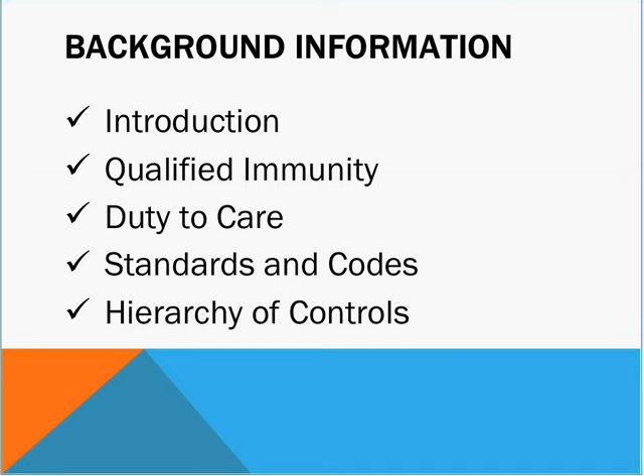Let me jump to the next, which you covered already. Anyway, in the beginning, I would like to give you a little bit of background about this subject matter, and let me begin right away.

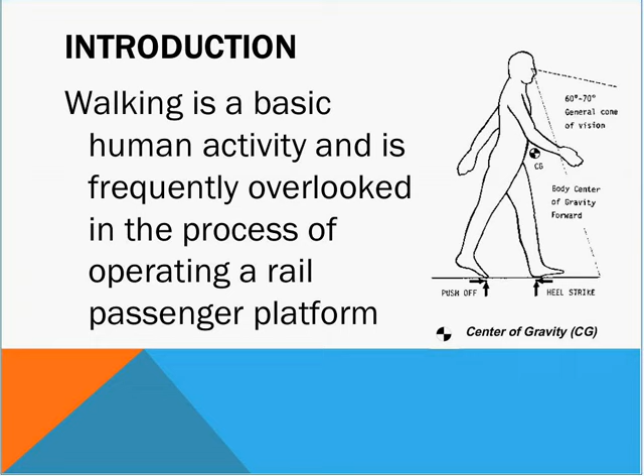One of the things we sort of take for granted, and it's probably one of the most complicated things that we do, is walking. It's a basic activity, and is a key factor in operating a rail passenger platform, although not given much consideration in most cases. We have a general tendency to blame the rail passenger when there's an accident. Usually we find that transportation companies or anyone says that the accident was caused because the person wasn't careful, wasn't watching where they were going.

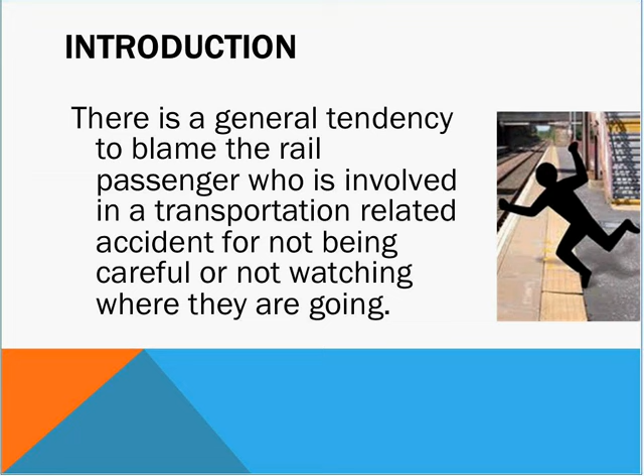One of the things to keep in mind when dealing with public agencies, and this is from New York State and applies to most states, is this qualified immunity, where if municipalities adhere to their guidelines, then they're exempt from the injuries that might be caused as a result of their adhering to their guidelines. That is called qualified immunity.

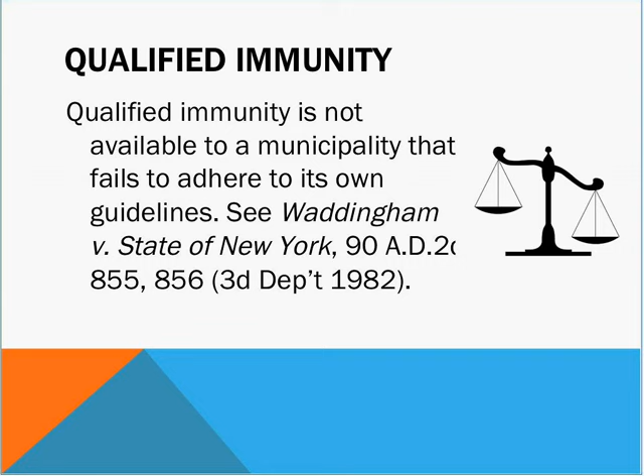It's my feeling that there is a duty of care required, and the important duties of care are to warn passengers of dangers, to properly train personnel to deal with dangers or hazards, have safety inspections on a regular basis, provide effective communication of when there is a hazard or a danger, provide platform personnel when there is a dangerous or hazardous situation, and to ensure that design standards are always updated as a result of industry changes in standards and guidelines, in particular the Americans with Disabilities Act.

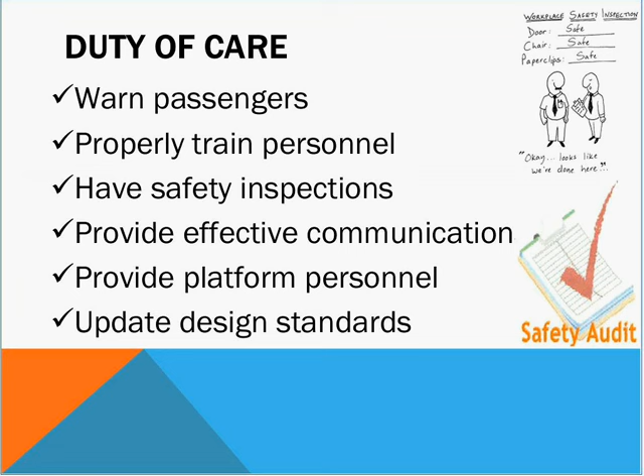One thing to bear in mind is that a standard is really developed as a consensus. It's generally the minimum that one should do, not necessarily the level we should be at. Because of the consensus requirement to build a standard or guideline, not all situations are covered by standards and codes. One of the things that should always be done is to have risk assessments on a regular basis to determine the level of risk, how to achieve compliance, and how to create an acceptable situation for the situation at hand.

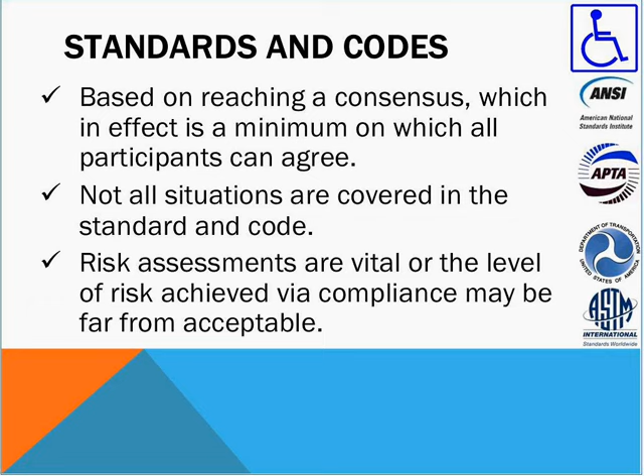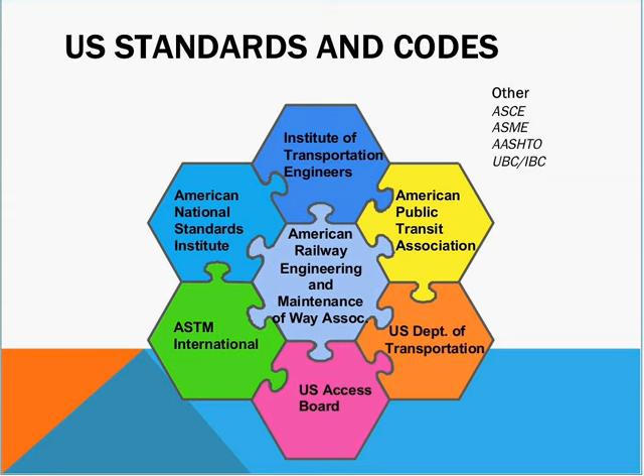Here are some of the codes that are out there: the Institute of Transportation Engineers, the American National Standards Institute, ASTM, the U.S. Access Board, which sets the ADA standards, the U.S. Department of Transportation, and the industry group for rail transit, the American Public Transit Association. There are also a lot of engineering groups out there: the American Society of Civil Engineers, the American Society of Mechanical Engineers, the American Association of State Highway and Transportation Officials, and the Uniform Building Code, which has now morphed into the International Building Code, the IBC.

There is a sense of a hierarchy of control. The first thing one can do is remove the hazard in the first place during the design process. If that isn't done, then the next step is to reduce the hazard through redesign or through engineering controls. And if that isn't enough, then through information systems, automatic and manual warnings and signs, and on a regular basis, inspection and training of personnel.

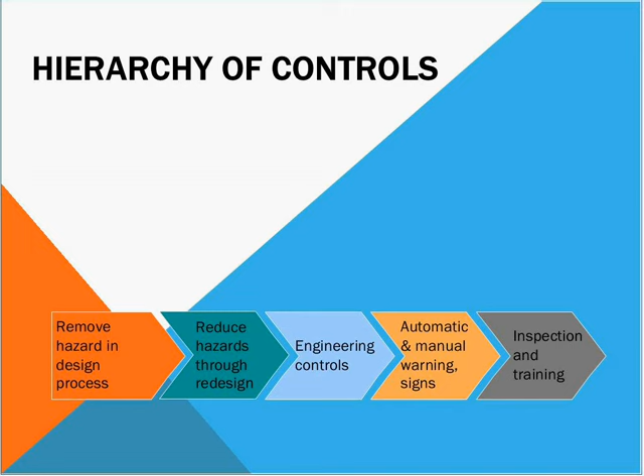Platform hazard prevention - this is the process one needs to go through to understand what hazards are out there. First is root causes, which involves the search for those factors that cause gap accidents in the first place, and to seek from among the available data the nature of the causes that lead to the undesirable consequences which result in injuries.

Causations are the factors present when you have a gap accident, such as a horizontal gap, a vertical gap, or a combination of the two, the lack of information systems, the knowledge and experience of staff, the training and retraining programs of staff, and the use of platform tactile strips - those yellow strips you see at the edge of platforms. In some cases, the placement of rubbing boards at the edge of the platform so the train can park closer. Also being used is extending the door sills with extender plates, and of course lighting.

Important in preventing accidents is the accident investigation itself. Sometimes there's a failure to collect hard facts - what happened - and by knowing what happened we can remove or prevent that in the future. There's a need to ensure a thorough analysis and a step-by-step procedure is created so we get a clear picture of what caused the accident. In many places, when a passenger is injured, the opinion is normally that it's the result of human error on the part of the person who's injured, and not any fault of anyone else.

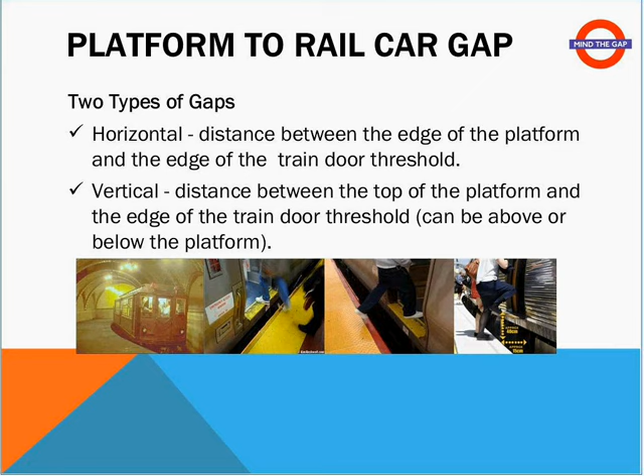There are two types of gaps: one is horizontal, and the other is vertical, and both are equally important. In most cases, one seems to be concerned with the horizontal and neglecting the vertical, but both are important. There are also two types of platforms: the low-level platform, where one has to step up into the rail car, and the high-level platform, where you go straight in.

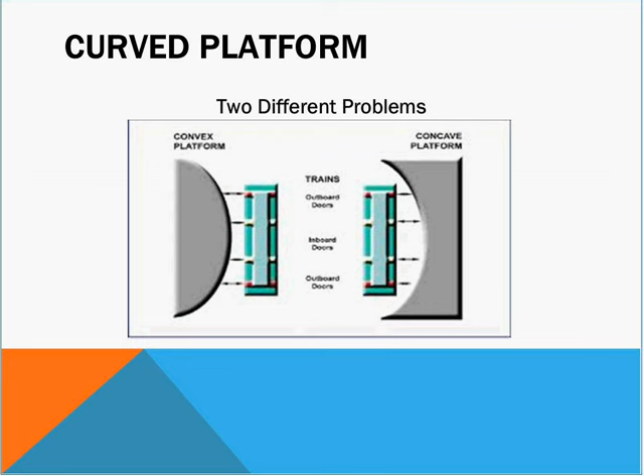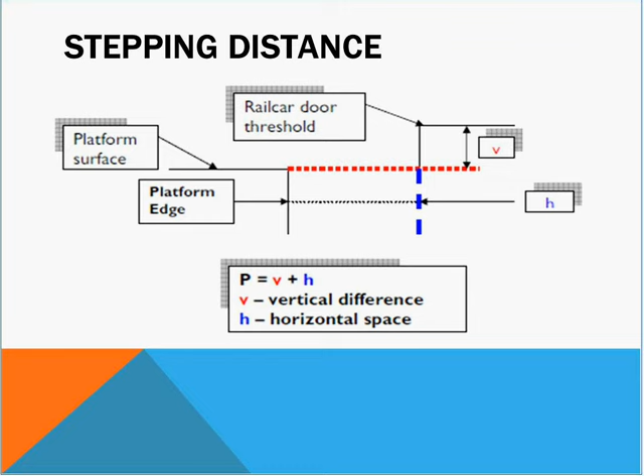Again, it's important to consider both the vertical and horizontal gap. There have been numerous studies in this area, particularly two - one in England and one in the Netherlands - where they found that the gap distance for both the horizontal and vertical together should never exceed 200 millimeters, about 7.9 inches. That includes whether the vertical gap is above or below the platform. Both are concerns - one concerns tripping, and the other concerns a misstep. We'll talk about that.

There are various attributes that can be considered that can reduce the dangers of boarding or disembarking from a rail car. The first is accessibility, where you have full accessibility for all users and the station platform meets ADA requirements. Active warning is important, where you accurately and functionally inform passengers of any hazards so they know what to do and how to handle it, usually provided through automatic message signs and regular announcements.

In terms of the level boarding area, the gap between the edge of the platform and the rail car should meet ADA standards: horizontally in the range of 3 to 4 inches, and vertically not exceeding 1.5 inches.

The area in which people board should have clarity. It should be obvious where one is embarking or disembarking, and it should be clear, with no obstructions or hazards, making the path the passenger follows relatively level and resistant to slipping. Everything should be conspicuous, ensuring that any potential hazard comes to the attention of the passenger.

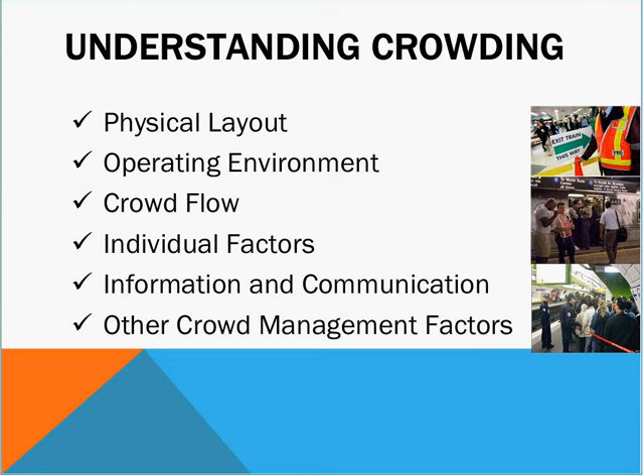A second area is platform crowding, which results from various factors that influence passenger behavior. Some factors are the basic design and fixed aspects of the platform, while others are flexible and can be influenced by actions taken by train station staff. We need to understand the layout, the environment, how the crowd flows, individual factors affecting crowding, information and communication systems, and other crowding management factors unique to a particular location.

Here's a way of visually cueing in to an accident: if you see the whole body, you don't have a crowding problem. If you see bodies one on top of another, you're beginning to have a crowding problem. If you only see people up to their shoulders, the crowding is getting more serious. And if you only see heads, then you know for sure there's a serious crowding problem. In the second, third, and fourth situations, one needs to take action to prevent things from escalating, because crowding is an accumulating factor—you can quickly go from level 2 to level 4.

Factors for crowding are numerous: the layout of the platform, obstructions on the platform, where access and egress is located, the time passengers arrive and depart, train timetables, how many different train lines use the same platform, coordination with other modes of transportation, weather, restrictions for passenger flow, areas where passengers could be in conflict, gathering points, and whether extra staff is needed on short notice and can be provided.

Does the operator have a crowd management program? If there's a sudden system delay, what impact does that have on crowding?

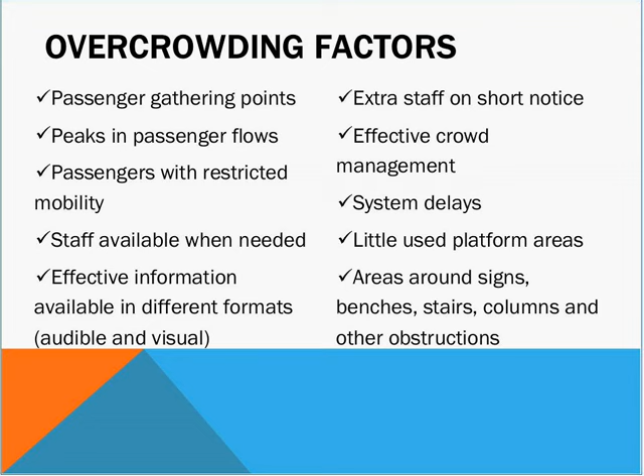One of the major ways of maintaining and controlling crowds, short of having staff out there including police, is to have effective information and to intercept passengers before the crowding situation is created in the first place.

One of the concepts—an old concept—that we use in terms of understanding platform usage is what we call level of service, and this was developed in 1971 by John Fruin, and it was interesting.

He was my teacher when I was going to graduate school, and I worked on this project. I never expected at the time that this would become the pedestrian international standard for understanding the movement of people in various situations.

In terms of walking on a platform, this is the amount of square feet needed. Level of service A is free flow, complete free flow, as is level of service B. As we get more crowded, the amount of square feet needed per person changes. A lot of transportation properties try to design for level of service C, where each individual has between 15 and 25 square feet in which to move around the platform.

When we reach level of service F, we're looking at that crowd situation where we saw just the heads of the individuals. At level of service E, we can sometimes see the bodies of the individuals, but we're getting to a point where we barely can see the bodies, mostly just their upper bodies. That's why most transportation properties want a safe system designed for level of service C, which is 15 to 25 square feet per individual.

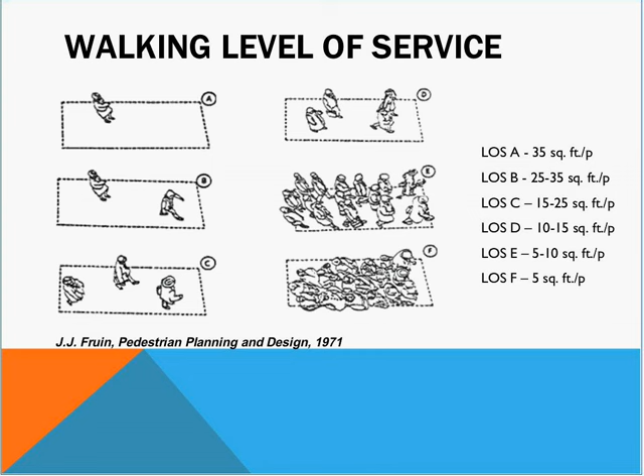That's for walking. On a platform, we're also concerned with people queuing up to get off the platform, queuing up to board trains, queuing up to get off trains, queuing up to get on an elevator, queuing up to get on an escalator. Here, designers like to use level of service C, which is 7 to 10 square feet per person, as the level of service for a safe platform for queuing, whether boarding or getting off the train.

You can see how tight it gets when we start moving down to level of service D, level of service E, and level of service F, which is analogous to everybody riding in an elevator with no room to get on. Everybody's just shoulder to shoulder.

As we know, people don't like to be too close. In the United States, we like to have a distance between us, while in other countries they will tolerate closer distances between people. In the US, we don't tolerate well being one on top of another. Level of service E and F is really not considered acceptable in our society in the United States. Level of service D is pushing the envelope a little bit.

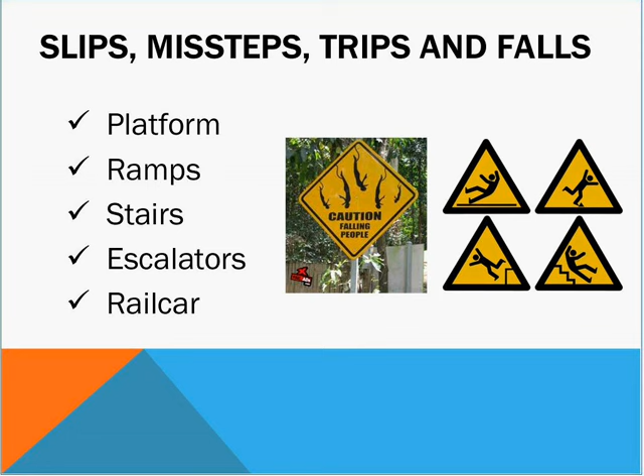Let me give you a little bit of background. As a passenger, we always expect that we're going to be safe and that the environment, when we travel on public transportation and rail especially, is going to be safe for us. Basically what happens is that we don't expect there's going to be a dangerous condition, and we're not made aware of it.

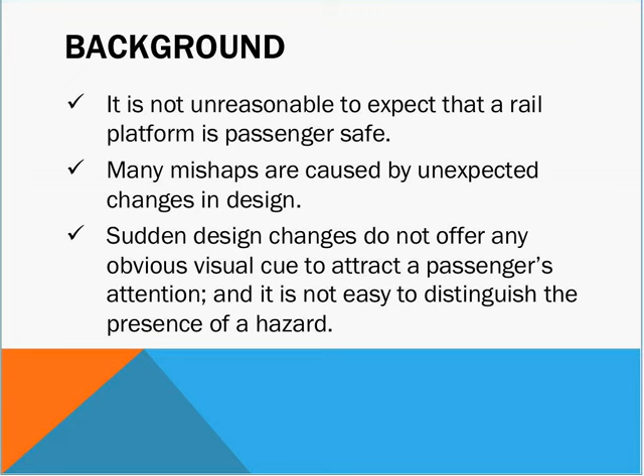The one thing to bear in mind, which I mentioned briefly, is that if there's a sudden design change and we don't offer some obvious visual cues to the passenger, and we don't bring it to their attention, and they're not able to address it, then they're not going to be able to distinguish the accident and prevent themselves from being involved in one.

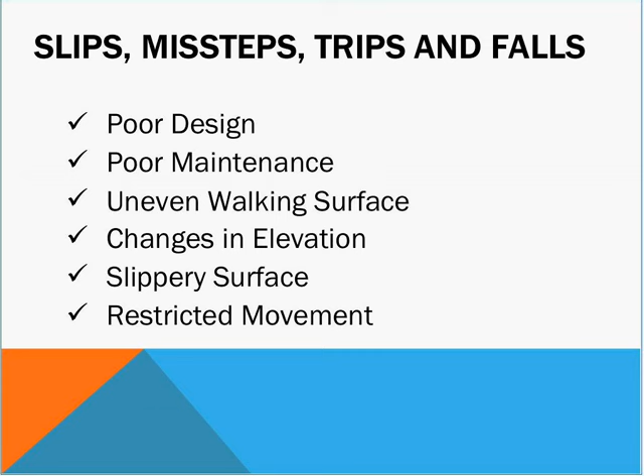As I mentioned in passing, slips, missteps, trips, and falls are the direct result of poor design, poor maintenance, uneven walking surfaces, changes in elevation, a slippery surface, and restricted movement as a result of overcrowding or other restrictions on the area where people are moving back and forth.

The best practices are really very basic. The cost of safety is a lot less expensive than the cost of accidents. Most important, at the basic fundamental level, is really to try to remove the accident in the first place.

I haven't really come across a platform accident that could not have been easily prevented, if the property understood the danger, identified the danger, identified the location, and quickly made the effort to eliminate the hazard.

Some of the preventive measures for slips, missteps, trips, and falls are using passive and active information devices, having information systems, signage and bulletins and brochures, and of course cleaning, maintaining, and repairing the walking surface.

To understand what happens when there's an accident involving walking, it's important to understand what walking is all about. As I mentioned in the beginning, walking is perhaps the most complicated function that a human has to perform.

We're always thrilled when that 11 and 12-month-old baby starts walking. We forget how long the baby was trying to move from the crawling stage to the walking stage.

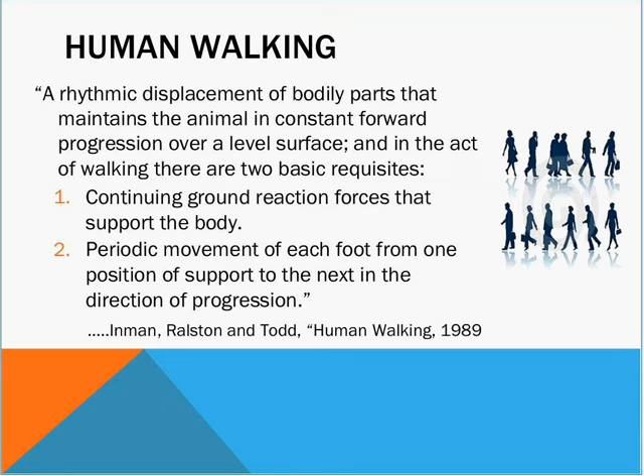Walking is basically an activity of imbalance. We keep walking forward progressively on a level surface, and as we walk forward, the ground supporting us on every step takes the body from imbalance to balance. If each foot receives that support, nothing happens and we walk along safely. It's when that balance is lost that we have an accident.

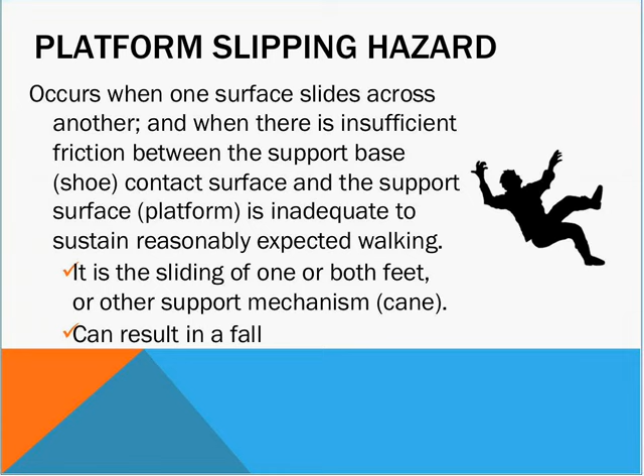Let's look at the slipping type of hazard. This basically occurs when one is walking forward and the surface is not able to hold the foot when it steps down. The surface between the shoe or foot and the walking surface has insufficient friction to support the body, so the body slips. Because there's inadequate surface friction, one foot slips out, or if a person is using support, the cane slips out, and the result is a fall backwards.

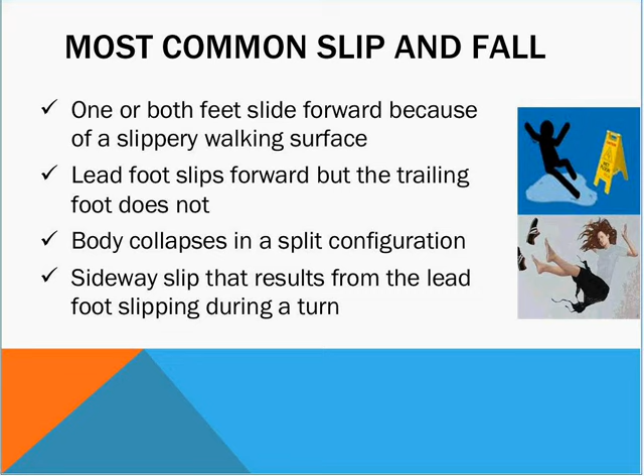Other types of falls include one or both feet sliding forward, causing the person to slip on the walking surface; or the lead foot slips forward but the trailing foot does not, causing the body to collapse in a split configuration. There's also a sideways slip that results when somebody is trying to make a turn, slips in the process of turning, and falls.

Just to give you a simple understanding of friction, this is one of Newton's original three laws. When we're walking, our weight holds the body down against the surface, and there's an equal and opposite force coming up from the surface. Friction is measured by the force required to push our weight forward, and usually that force is less than our weight.

The closer that force is to our weight, the closer we get to a coefficient of 1. The coefficient of friction is a relation between the weight of our body and the force required to move that body forward. Generally it's recommended that coefficient should be greater than 0.5, and the greater the better, because the greater the coefficient of friction, the less possibility there is of slipping.

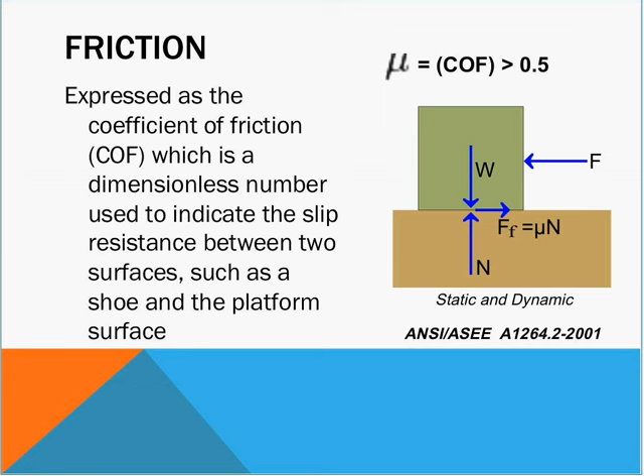There are two types of friction: static and dynamic. Static friction is when the object is not moving, as when we're standing still, and dynamic friction occurs in the process of moving. While a body is in motion, the coefficient of friction would be somewhat less than if it was measured in a static situation.

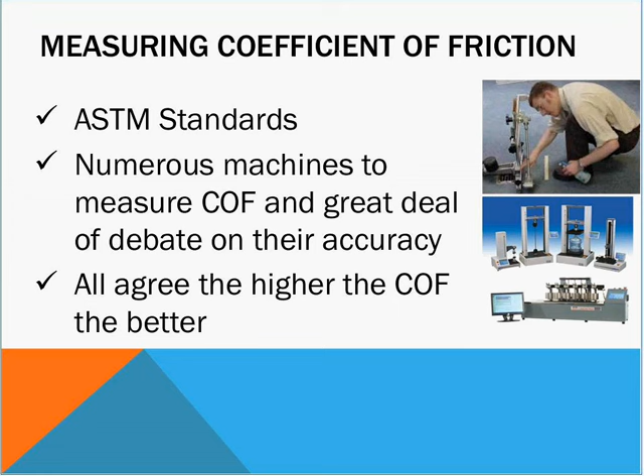There is various equipment out there to measure coefficient of friction, and there's an ASTM standard for using these machines. There are innumerable machines out there, and many people earn a living from this, doing a lot of laboratory work. Each machine gives a slightly different answer, but the one thing all the machines agree on, even though they don't agree on the measurement itself, is that the higher the coefficient of friction, the better. That's sort of an obvious statement.

A tripping hazard is caused by some kind of obstruction in the pathway, like a raise in the walking surface where the toe of the individual gets caught, and as a result of the toe getting caught, the person falls forward. This is also the kind of situation you get with a platform gap, where the rail car is below the platform, and when the person is trying to get off, the trailing foot hits the platform and causes a trip.

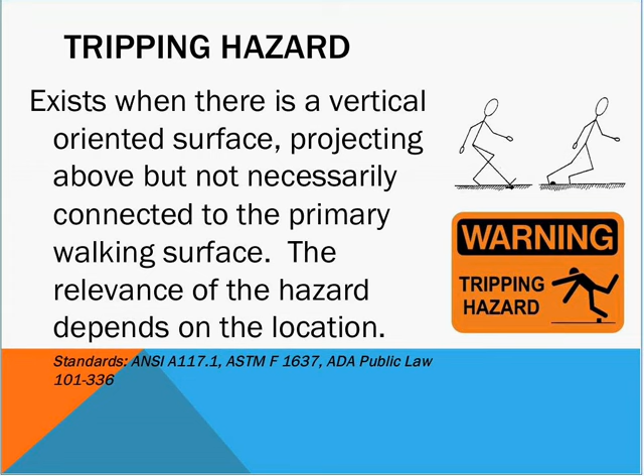One of the standards that has been developed is in the Americans with Disabilities Act, which recommends that no protrusion from a walking surface be greater than 0.25 inches, and if it's between 0.25 and 0.5 inches, it should be sloped. That's what the standard says.

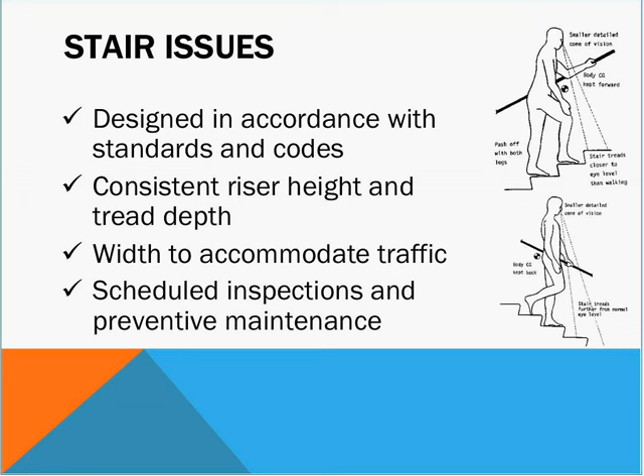Stairs are another matter. When climbing stairs, your center of gravity is forward, and when descending, your center of gravity is in back of you. A way to have safe stairs is to design them according to the standards and codes out there, primarily building codes, so that riser height and tread depth are consistent. Inconsistency is the surest way of creating an accident on stairs. In a transit operation, one also has to be concerned about the width of the stairs to accommodate traffic. Stairs, like any other walking surface, are subject to maintenance issues and need to be scheduled regularly for inspection.

Ramps are a slightly different issue. The steepness of the ramp can affect its safety, along with the coefficient of friction. If you have a low coefficient of friction and a steep slope, you can see the potential for accidents. We need to be concerned about concrete wearing too smoothly - concrete generally has good friction, but if it smooths out like any other smooth material, it can result in a dangerous condition. Slopes should have handrails to assist if the slope is not of a gradual nature.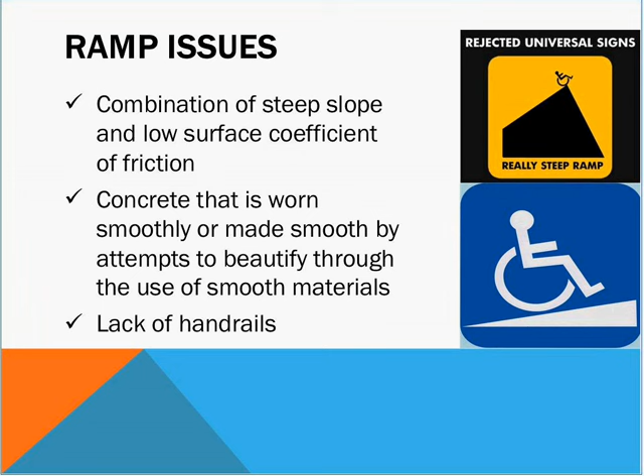Another area of concern that's received a lot of press is train door accidents, where doors close prematurely and capture a person suddenly. Some of these are headlines I've taken from newspapers: doors close on passenger's neck; a young child is caught on a stroller; a person caught in the door, mooning the people on the platform; a woman died after her hand got caught in the door and she was dragged along.

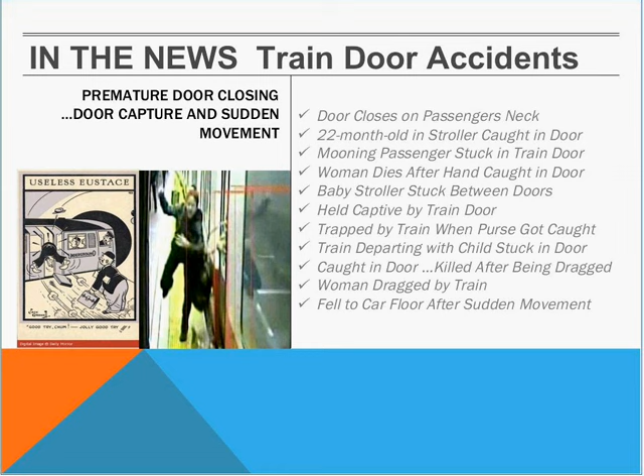There are pictures of baby strollers getting caught in doors, people being held captive and trapped, and doors departing and dragging people along the platform. These are serious accidents with serious injuries, and door capture accidents are still occurring. There's a program undertaken by the National Academy of Science, Transportation Research Board, where they work with transit properties, which send them information they collate and evaluate to try to improve the system throughout the United States.

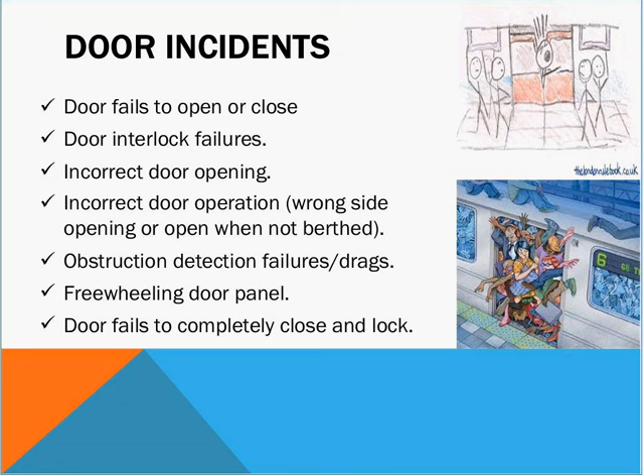Some other door incidents that occur: doors fail to open or close, or there's a failure of the interlock and the train pulls out with doors open. There have been examples of doors opening between stations, and many cases of incorrect door operations where they open on the wrong side. There are also obstructions where there's no detection and people are dragged, doors that freewheel - opening and closing repeatedly - with the train pulling out with doors open and closing, and cases where doors fail to completely close and the train pulls out, causing injuries.

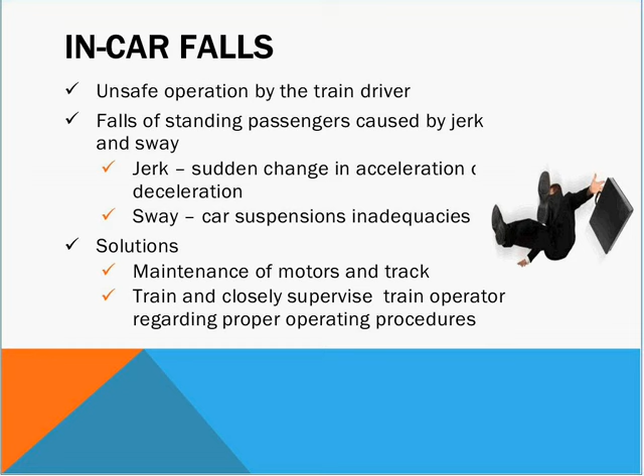Unsafe operations occur where most transit systems are designed so accelerations and decelerations are held to a limit called the jerk rate - a rate of acceleration that can prove dangerous to a passenger, causing them to fall and injure themselves. Also, because of the car suspension system, the car can sway and cause accidents. One solution is maintaining the motors and the track so the cars don't sway, and also to train and closely supervise train operators so they don't exceed the jerk acceleration rate.

Passengers end up falling on tracks. Some of the primary causes are medical reasons, slip, trip, and fall, suicide, being pushed by a crowd, and lately we've seen a lot of people retrieving their iPods, iPhones, and iPads, with disastrous consequences as a result.

The train operator has a lot of responsibilities. Their primary focus when they enter a station is to focus on picking up and discharging the passengers. They are not prepared for a chance encounter of a track incursion, that is when somebody falls to the track. Their focus is on bringing the train into the station and loading the passengers, and there is little training that goes on in guiding operators into observing or looking for that which they are not usually seeing, an unusual circumstance.

Events have to be expected. If an unexpected event occurs, there's the risk that it won't be seen. We all have a tendency to look, but not always see everything. Operators, in general, always operate in a predictable and lawful manner, and they work long, hard hours, and they focus their attention on what their job skills require them to, and that's to bring the train in safely. So if there's an unusual circumstance and they're not prepared for it, sometimes we could have an emergency, and sometimes the consequences could be disastrous for that passenger which has entered the right-of-way of the train.

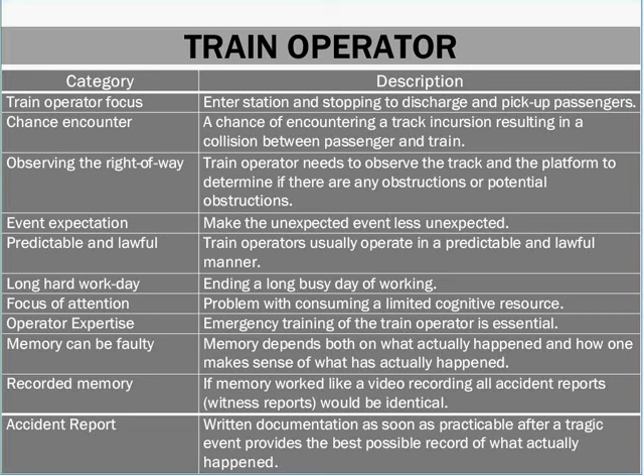In some transit properties now, they're installing video cameras, so we do have that recorded memory, and they're asking that the written documentation reports be done as quickly after the accident as possible so that the best possible record can be obtained of the accident.

Some of the human errors that occur that result in accidents are the lack of attention, the inability to see or hear specific features, inadequate knowledge, violation of the rules, violation of procedures, an unintended action, a slip or a lapse, and just plain old tiredness and fatigue.

Things happen so quickly, and generally the person who has to respond takes approximately 1 second to perceive, if they do perceive, and to be able to react. That process is a 5-step process: you see what you can see, and it becomes visible. If it's a passenger in the right-of-way, the passenger is seen, and the operator sees the passenger in the path. What happened is understood, and the operator recognizes the situation and determines what action to be taken, and the operator moves to take that action, and the action is completed, and the end result is an emergency braking situation.

It sounds like a long time, but these things generally take about a second to occur. If the operator is well trained, it could even take less than a second. Some transit properties are now using simulator systems to better train the operators so that this approximate 1 second can be reduced to even a lesser time.

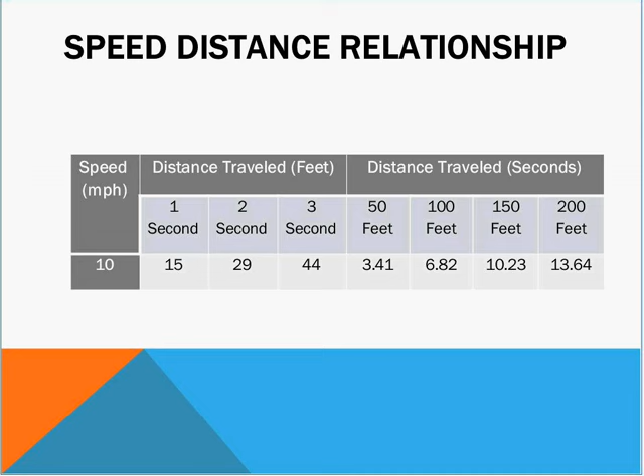Just to let you know, if a train is going at 10 miles an hour, it moves 15 feet in 1 second. And if it's moving 50 feet, which could be the length of a car, it takes 3.4 seconds at 10 miles an hour.

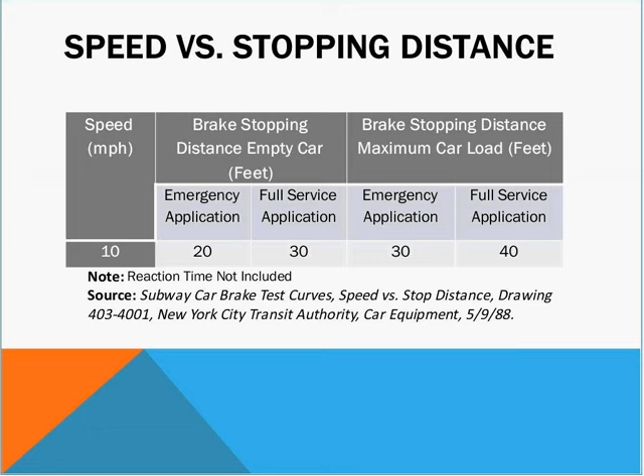If a train is going 10 miles an hour and applies the brakes in an emergency situation, when the vehicle is empty, it takes 20 feet, and it takes 30 feet in a normal situation. So we are under a misimpression that you slam on the emergency brakes and you get a magnitude of 2 or 3 in terms of stopping. The improvements are only about 50%, and sometimes even less than that. In a full-service operation, it's only 25%. When you have a fully loaded vehicle, the emergency is only 10 feet less, so it's 30 feet instead of 40 feet. This is from studies done by the New York City Transit Authority, and are somewhat similar for other transit properties as well.

So I wanted to leave you with one basic thought to think about, and that is, let's always think safety. My dad, who was a real estate attorney, always used to say to me that the most important thing in real estate is location, location, location. And the most important thing in terms of avoiding accidents on platforms is to think safety, safety, safety, safety. It's no more complicated than that.